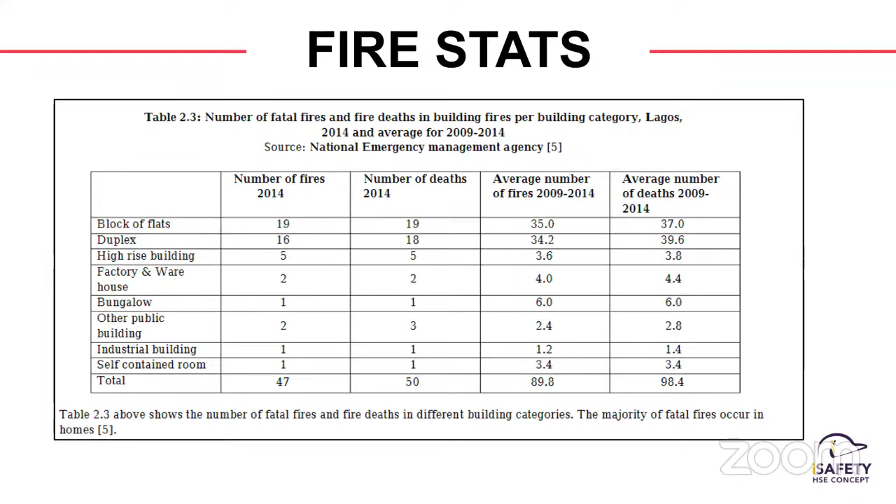Well, a lot of things are not actually disclosed to the public. There's a lot of management of incidents, so I don't want to contest this, but I also feel there should be more incidents that could have happened that are not captured in this table. So when we're talking about active fire protection, what exactly are we referring to?

This is something we're all used to. When we talk about active fire protection, we're talking about the ones we see—your alarm system installed in your facility, your fire extinguishers positioned at different areas of your facility. Those are the active fire protection. The word 'active' comes from the fact that an action is required to activate this equipment.

You have your manual call points that need someone to actually break the glass to activate the alarm. You need someone to pick up your extinguisher and try to fight a small fire before it becomes big. We can go on and on like that. We also have the automatic ones too, in terms of your FM200 installations, your sprinkler installations, your deluge systems, and we can go on and on like that.

An example of an element is a fire extinguisher requiring manual use, or sprinklers—I mentioned that already. We can mention so many things that fall under active fire protection, from hose reels to extractions, ventilators, and so on. They're all part of active fire protection. If you check your homes, your facilities, we have this installed, whether conventional systems, addressable systems, or a combination of the two in your facility. So that's how far we've gone on that, which is quite a beautiful thing. But as beautiful as active fire protection is, it has some limitations.

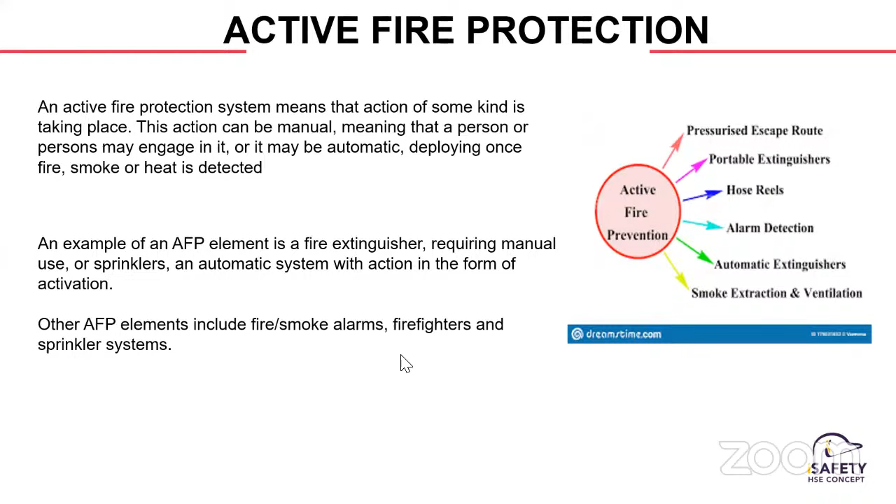There are some limitations we've observed around active fire protection equipment, which are things that passive fire protection helps take care of. The alarm systems will not put out your fire. Alarm systems don't put out a fire. Yes, there may be a chain of reaction—the alarm comes off, there's a signal conditioner somewhere, something activates something, then your FM200 or sprinklers get activated, things like that. But the alarm system in itself will not quench a fire.

There's always a need to depend on humans, and we know humans—their level of competency is measured in terms of knowledge, ability, training, and experience. So there's still a limit to it. If you have 20 persons in a facility, you may not have more than 1 or 2 people who can actually fight a small fire successfully. Some people will rather take to their heels, some will just start screaming and creating a lot of panic around it. So that tells you where we are when it comes to depending on humans to help us fight these kinds of situations.

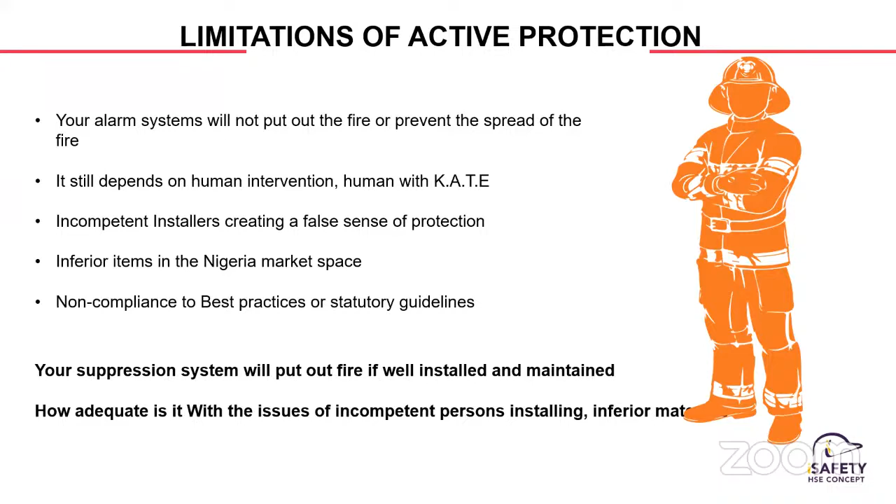So when we talk about smoke detectors, this is a chart showing some incidents that happened with faulty detectors. If you look at this, it shows fatal fires that occurred within a period of about one year, and some of the causes were picked up in line with the availability of devices like smoke detectors.

About less than 20% - it was unknown whether the smoke detector was present or not. Less than 20% had a smoke detector present, but it was unknown whether they were functional. In other cases, smoke detectors were present but failed to function. Maybe one Baba has installed your detector, and as far as it's blinking a light, you say it's working.

So with routine checks, ensuring a proper contractor selection process - am I using a certified person to get this done? All these are things we as professionals in the industry need to start checking out. Then there's smoke detector present and functioning - beautiful. Then we have a large number of buildings or fires that occur where we don't even have a smoke detector installed.

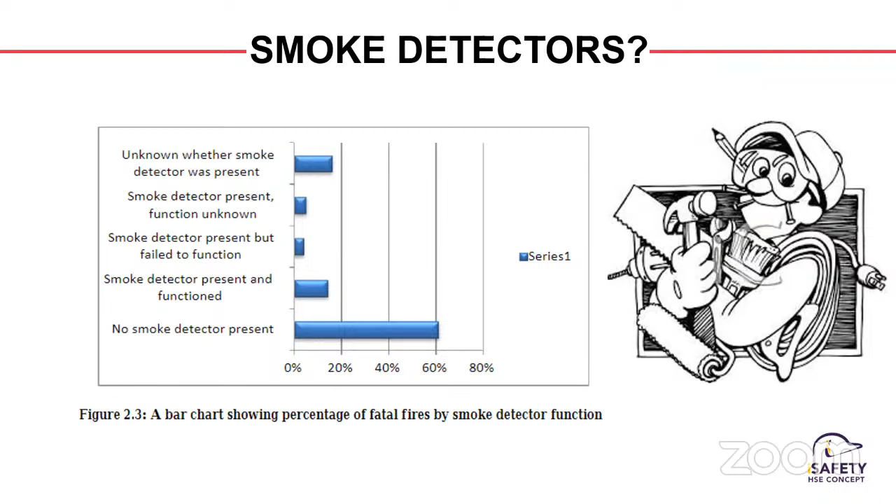This data covers both residential apartments and industries. I visited one of my clients' facilities, and once I visit a facility like that, I try to look around at what's happening. I was amazed that a company as big as that didn't have a fire alarm system installed, yet they had machines worth millions of naira, millions of dollars installed there. It sounds funny to spend so much money to start a business, put up machines together, and not have a functional fire protection system to protect the millions you've invested.

I have a couple of data here also. Fatal home fires by smoke detector function, between 2009 and 2014: no smoke detector present, 61%. When we talk about our residential homes, people assume smoke detectors are strictly meant for industries and maybe for public places like hotels and malls. But what about our residential homes?

There's a boom in the real estate sector, especially in Lagos, Delta, and Ogun. Buildings are coming up, people are spending millions of naira to put up structures. You spend so much money like that, and you don't have a detector and an alarm panel installed.

How do we even incorporate this? There's something I saw during one of my travels, for a block of buildings, privately owned. I saw detectors installed, and I saw how it was wired so that the closest fire service station would be notified immediately if there's an alarm in that building or flat. Amazing that they don't even need to do anything else, though of course there are a couple of false alarms. If a false alarm comes up in your facility, you're charged for it, because by then the firefighters are already at your doorstep. That tells you how a system works.

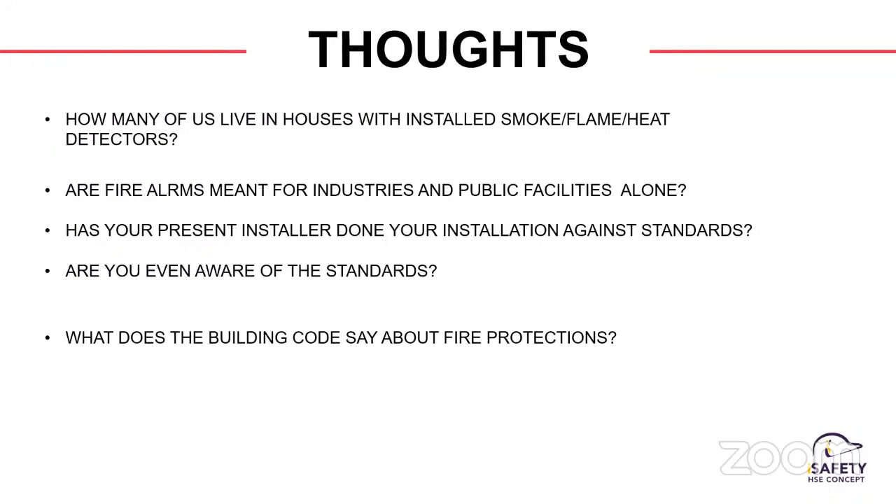Now, moving to the passive parts, passive protection - this is actually a beautiful one, and this is where we'll be doing most of our discussion today. Passive fire protection is a kind of system incorporated into buildings or structures that slows or impedes the spread of the effect of fire. In the course of my traveling around, I saw where this actually works, whereby a particular section of a house is on fire and it doesn't spread to any other parts of that building. This is applicable to both high-rise buildings and small buildings, buildings with a small number of occupants, small number of spaces, demarcations - a beautiful thing. I saw this and I feel, wow, this is nice, and this is something we need to incorporate into our buildings.

So passive fire protection comprises components or systems of a building or structure that impede the spread of fire without system activation, and usually without movement. Built into the structure of the building, PFP is about preventing the spread of fire, containing fire to compartments. In a situation whereby, like I said, a building has about 6-7 stories and a particular part of a story is on fire, it does not spread beyond there. It will keep burning, giving you ample time to actually fight it. It's not like a fire already burning in room 1 spreads to room 2, the whole floor is on fire, spreads to the second floor, spreads to the third floor within a few minutes.

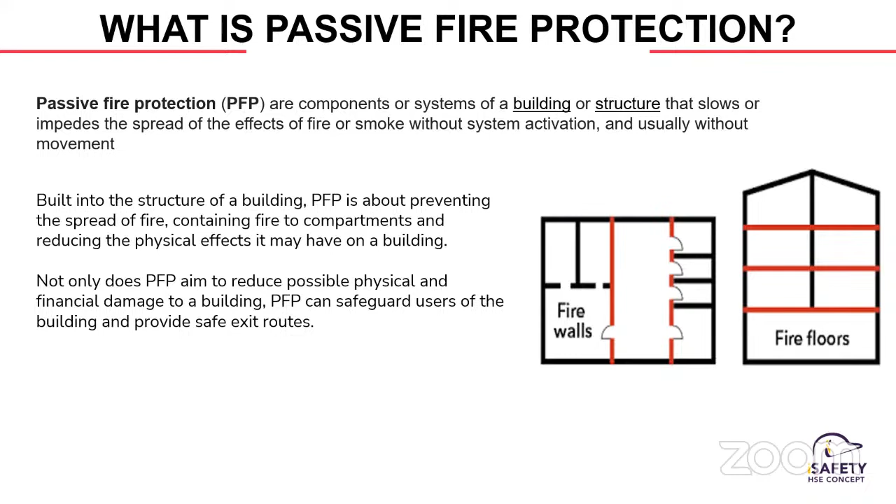The key to the foundations of many PFP solutions is creating compartments. I mentioned that earlier on, designed to isolate fires and prevent spread. I know I'm speaking a lot of English around compartments and the spread of fire.

I will explain how this is made possible, and how we as professionals need to start thinking in the line of passive fire protection. So what's actually expected of us? A building or part of a building comprising one or more rooms, spaces, or storage constructed to prevent the spread of fire.

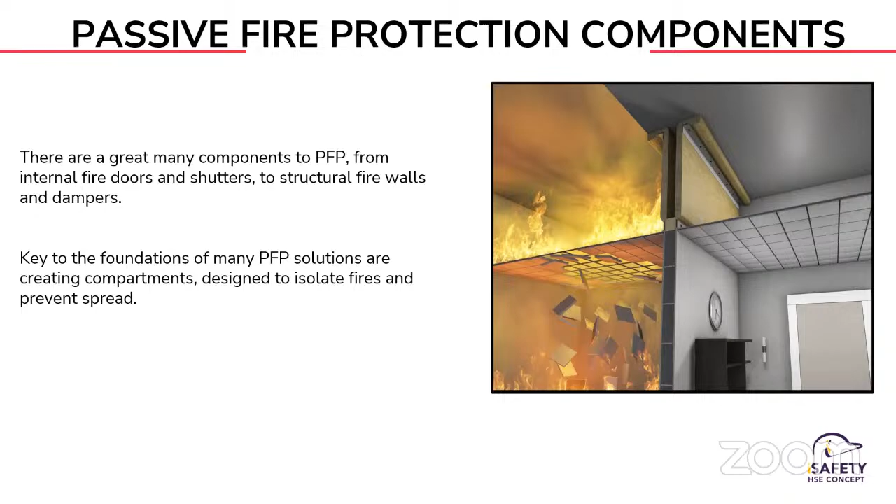Sorry, I'm back again.

So this compartment can be done by three main methods. We have cavity barriers - void spaces within walls, above ceilings, or below suspended floors, fitted with fire-stopping materials. We have penetration sealing. For some of us into facilities, building, construction, civil works, you'll understand better when we talk about cavity barriers. For those into pipings, sewage pipings, all these come together when talking about creating compartments for a building.

Compartmentalization of buildings and sealing cavities prevent the spread of fire - that's talking about penetration sealing. The last one is fire compounding, substituting when materials have penetrations passing through, such as wires and pipe works. Because a building, we all know what goes into it - we have cables moving from one place to the other, pipe works that need to move from one part of the building to the other. All these come into play in proper designs when doing compartments in passive fire protection.

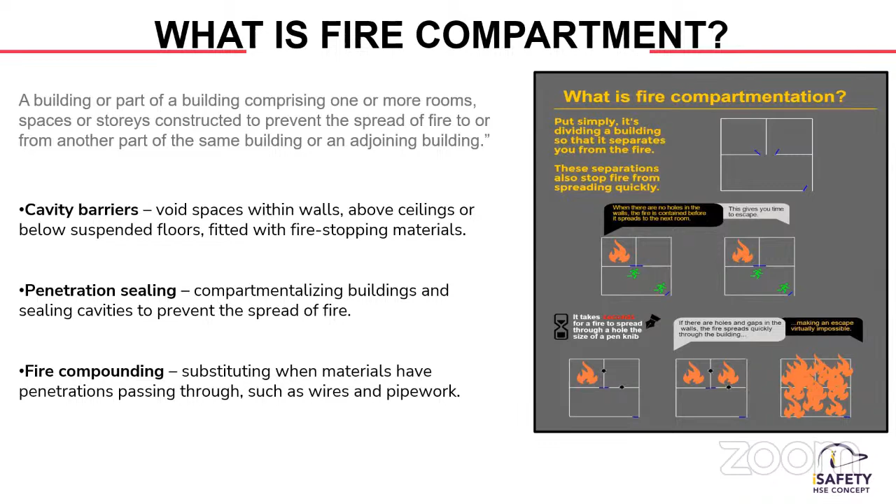Many PFP components are fire resistant - the ability of construction elements, doors, floors, walls, to withstand and resist fire for a period of time. The three main ways of resisting include resisting structural collapse, resisting passage of smoke and hot gases - that's talking about integrity - and resisting heat conduction from one part of the building to the other. All these form part of what makes passive fire protection.

It's also important for me to state that not all PFP elements have all three capabilities, but it's very important that we know exactly what we're trying to protect, and what the risk is that we're actually dealing with, so that will guide us in providing the best solution when we're running our PFP program.

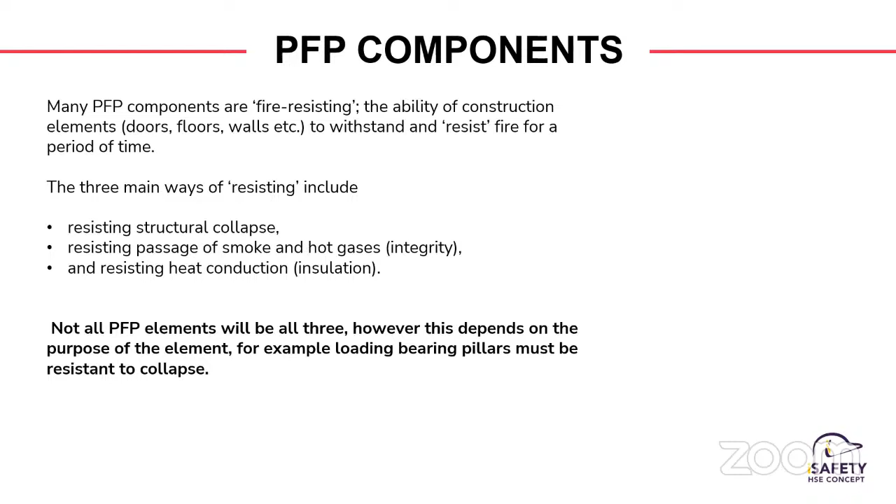Now trying to make a comparison between active and passive. Active and passive forms of fire protection vary according to activation. So in as much as it's important to have active fire protection in place, it's also important to have passive fire protection in place, and it takes away the dependency on man or intervention from someone before it actually gets activated.

Active fire protection requires action in the event of a fire, whereas PFP is a fire protection system whereby no manual or automatic intervention is required, because it's actually part of the structure of the building. This dichotomy is also seen as a difference between preventing spread and damage of fire, which is PFP, and the actual reduction and putting out of the fire, which is AFP.

I mentioned some examples of AFP earlier, like fire extinguishers and sprinklers. Although one may overlook the need for PFP systems if a building has adequate AFP components, the two systems are most effective when used together.

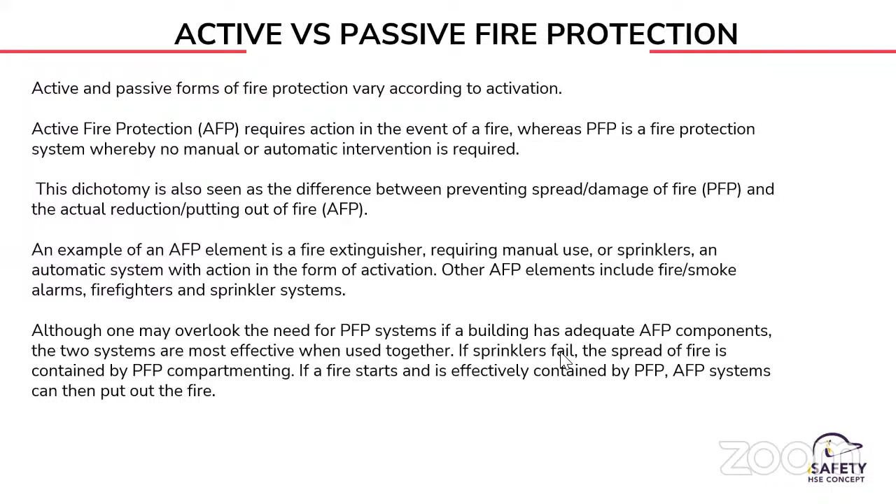Now, if you look at the buildings, I would like to look at our industries, for example. I look at some areas where I feel there are priorities when it comes to passive protection.

Please kindly exercise patience, I think we lost him again. He's back.

So sorry everybody, I was trying to make a point. I would like contribution from everybody now. Where are the areas that, looking at your own workspace and environment, you feel that we can have PFP?

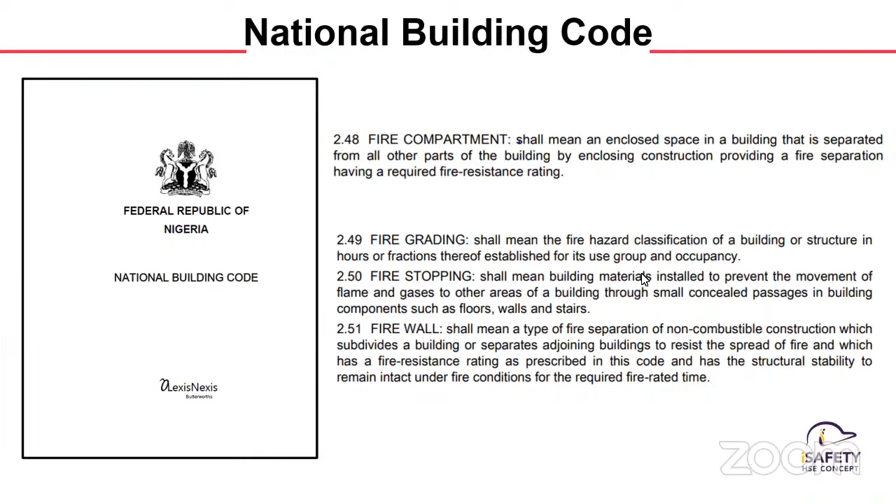So he's talking about the National Building Code, which is a code established by the Federal Republic of Nigeria. It talks about fire compartment, telling you that we have our guideline.

Okay, can you show them now? Yes, I'm on now. Okay, so let me just round this up.

So with all these talks about active fire prevention and passive fire prevention, how do we now start implementing this in our workplace? The first thing we need to do as safety professionals, as responsible persons, is to carry out a detailed fire risk assessment of our facilities. Whether it's a green field or a brown field, it's important that there's a detailed fire risk assessment where all these risks will be identified. I tell my colleagues, HSE's job has gone beyond just performing JHA for a contractor. It's very important that we as safety professionals start getting involved in design. We need to understand how designs are made. We need to have our input. Yes, I know the culture is different from one place to another.

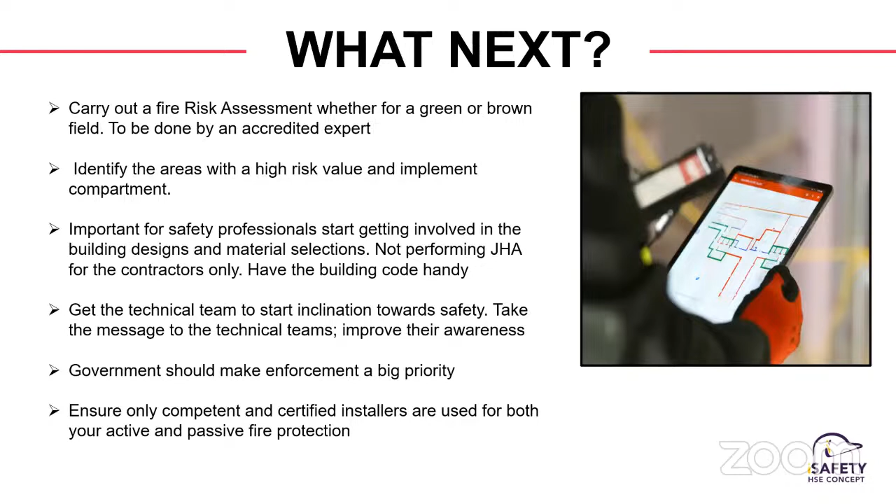Ensure only competent and certified installers are used for both your active and passive fire protection. Demand their certificates. Understand the standards yourself, and this will go a long way. Lastly, you are the responsible person, so it's important that you take responsibility. Don't say, I'm not in the engineering department, I'm not in the technical department, so it's none of my business. If there's a fire in the facility and there's a failure, you will be called upon as a safety manager, safety officer, or facilitator, whatever role you have in the organization.

Thank you, and that'll be all for me.